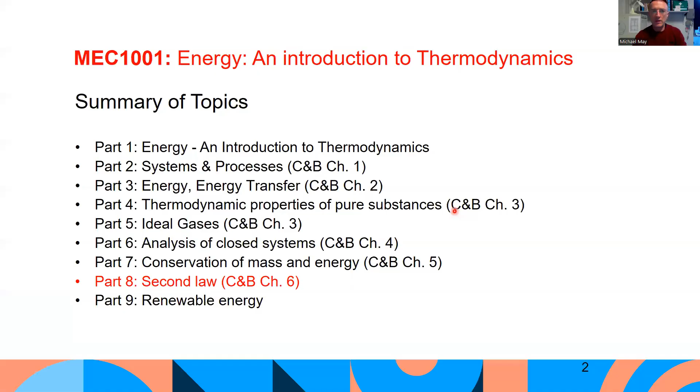So the second law, moving on to part 8, which is the second law. In this, we're going to cover the second law of thermodynamics, heat engines, refrigeration and heat pumps, the Kelvin, Planck and Clausius statements, Carnot cycle and perpetual motion machines.

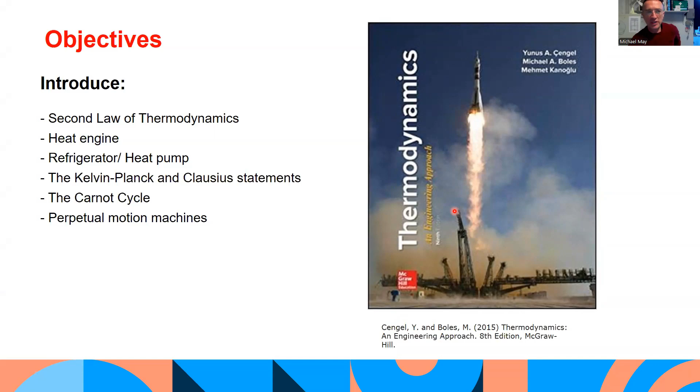So the first law basically tells us that energy is conserved. So if we think of a cup of coffee that's 80 degrees in a room that's 20 degrees, eventually when the coffee cools down, its energy is migrated to the room. And that's the first law in action. The energy is not in the coffee anymore, it's over here in the room. So we've accounted for it somewhere.

But imagine the reverse situation happening. Imagine the energy in the room finding its way back into the cup of coffee again and heating it up. To do so would not violate the first law because energy is still conserved. But we know from observation and experience that this type of process doesn't happen. So we need a second, another law, basically, to cover this situation.

And that other law is the second law of thermodynamics. What the second law tells us is there's some different statements of the second law, which we'll cover, official statements of the second law, later. But it basically describes the nature of energy in the way that it moves. One way is from a high temperature to a low temperature, and not the other way around. So it will go from the warm cup of coffee to the cold room, but it won't go from the cold room to the warm cup of coffee spontaneously.

But another way energy moves is from a high quality to a low quality, and not the other way around. So an example of that would be a mechanical stirring device. You plug it in, the electrical energy is turned into mechanical shaft work, so that starts to rotate in the water. As it does, the water heats up, and that heat eventually dissipates to the surroundings.

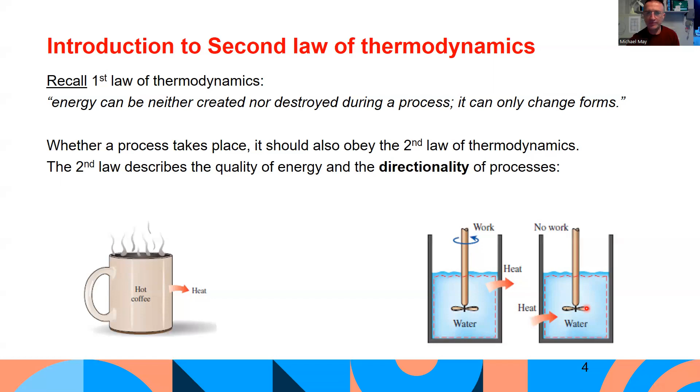We do have systems that will help us do that. A system that will help us take an amount of heat and turn it into work is called a heat engine. It needs an energy supply to do that, and we're going to go through heat engines in a few moments. The system that will help us move energy from a low temperature to a high temperature is a refrigerator or heat pump, and that also requires energy in the form of a work input to make it happen. We'll go through that in the second part of part 8 of the course.

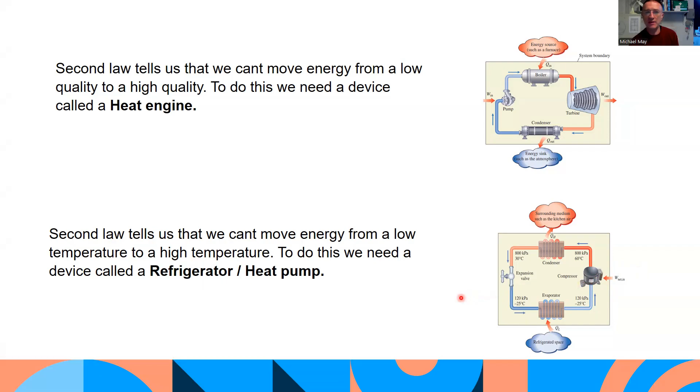So before we introduce the concept of a heat engine, let's introduce the concept of a thermal energy reservoir. A thermal energy reservoir is a hypothetical body with a large amount of thermal energy capacity that can absorb or supply heat without undergoing a change of temperature.

So imagine putting a small cup of coffee or a small cup of water into a large container of water that's at 30 degrees. If the cup of water is at 90 degrees, it's probably not going to change that large body of water to any great extent. If you had a very, very sensitive measuring instrument, you might detect a small change. So for all intents and purposes, it's a thermal energy reservoir that can give or receive energy without noticing a temperature difference itself.

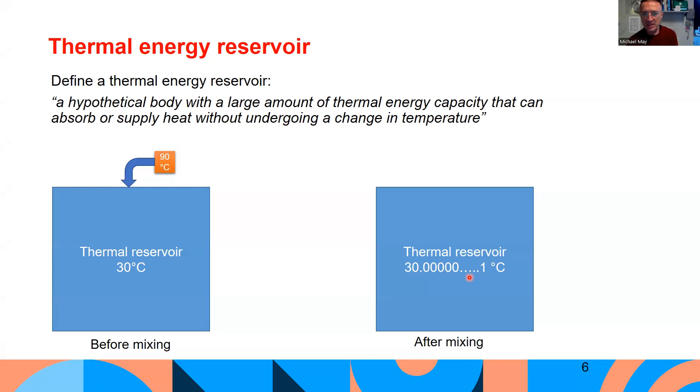Examples would be large bodies of water. For example, the power plant down in Poolbeg gives up its energy to the Liffey water, and the Liffey water doesn't experience any change in temperature because it's such a huge, large body of water. The atmosphere is another example - some power plants release their waste energy to the atmosphere, and the atmosphere's temperature doesn't change because it's so big in comparison to the small emission of heat from the power plant.

Liquid vapor systems go through the latent heat of evaporation. As water boils, for example, it absorbs heat but won't show a temperature difference. A furnace regulated at a certain temperature can give off heat and supply it to another process without having its own temperature drop. So there are two types of heat reservoirs: a source, which supplies energy in the form of heat, and a sink, which absorbs energy in the form of heat.

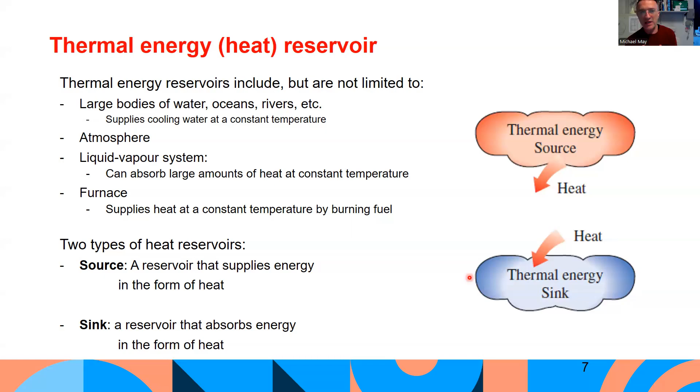That brings us to the definition of a heat engine. It's a device that converts heat into work, characterized by the following: it receives energy from a high temperature reservoir, an amount of that heat is converted into work, some energy is wasted or rejected to a low temperature sink, and the working fluid operates in a cycle.

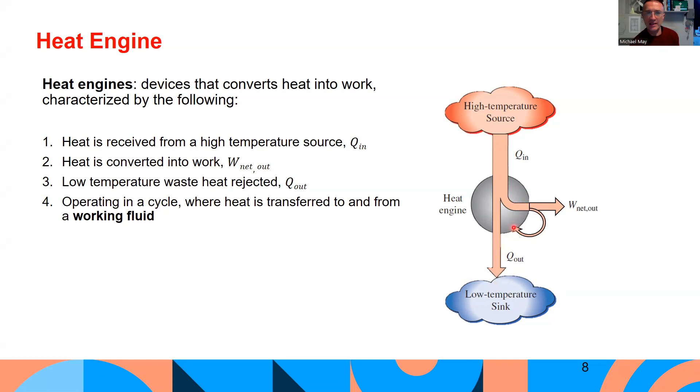So once again, a heat engine is a system that performs the conversion of thermal energy into mechanical work. The system brings a working fluid via a heat source from a high temperature reservoir, while transferring heat to the colder sink until it reaches a low temperature state. During this process, some of the thermal energy is converted into work by exploiting the properties of the working substance.

So we take energy from a high temperature reservoir, produce an amount of work, there's heat given off to a low temperature sink, and the working fluid operates in a cycle.

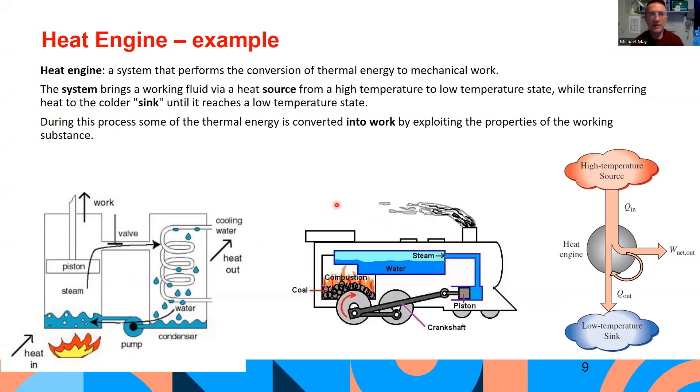Some people regard the internal combustion engine as a heat engine, but strictly speaking, the working fluid's not operating in a cycle. Compared to the book we work off, it's not strictly a heat engine, because the working fluid is the air and fuel mixture at the intake, and when it combusts, it goes out in the form of gases, not to come back into the system again.

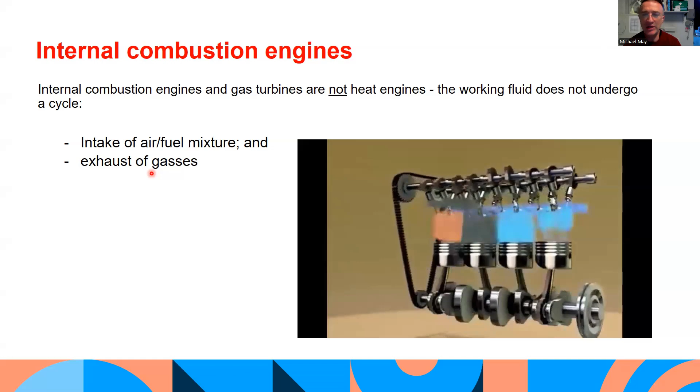Now, the theory about steam engines is quite old, and the internal combustion engine is more recent. So they're categorized in more recent times as heat engines, but don't strictly fall under that category according to the strict definition where the working fluid operates in a cycle.

The best example we have is the power plant. We boil up water in the boiler, it becomes superheated steam and drives the turbine. Then the water condenses back down to liquid again, and it's fed back to the boiler.

So we're taking energy from a high temperature reservoir, let's say the burning of natural gas or even a nuclear reaction. The amount of work is done at the turbine, then there's heat given off at the condenser, and the working fluid operates in a cycle.

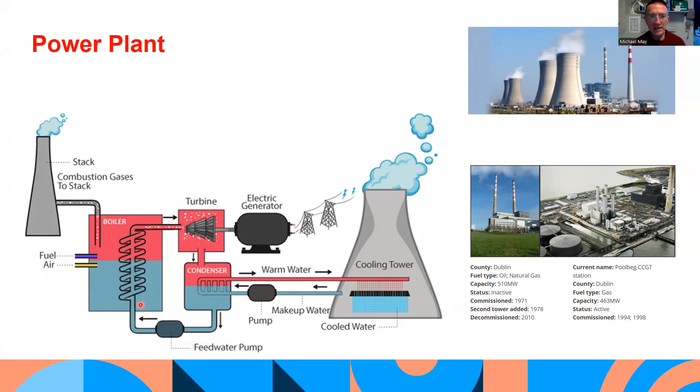The net work out of a heat engine is the work coming out of the turbine minus the work that goes into the pump to circulate the working fluid. For a system undergoing a cycle in steady state operation, the net work out equals the net heat.

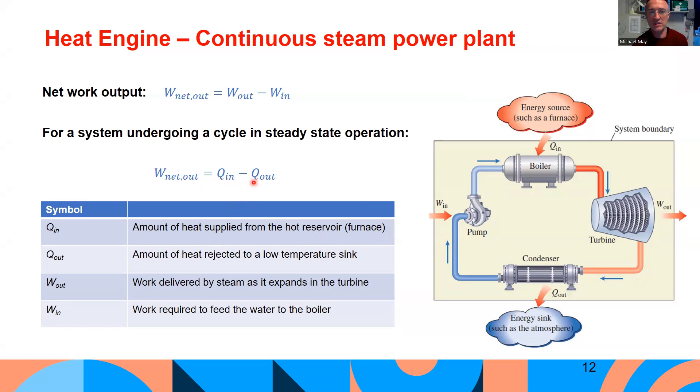So the thermal efficiency is the net work out over the total heat - what we're getting out of the system in the form of work, divided by the heat that goes in to make that happen.

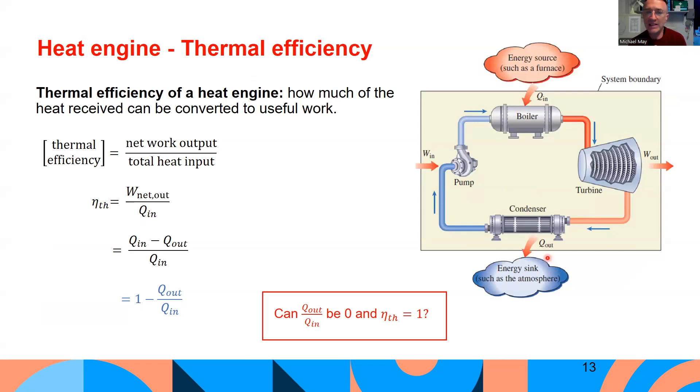That's the efficiency. As we've already seen, the net work out can be expressed in terms of Q in minus Q out. Mathematically, that can be rearranged as 1 minus Q out over Q in. And what we can see from this equation is that if Q out was 0, this term would be 0, so 1 minus 0 is 1, which is 100%. So if we could eliminate this step where we waste energy from the condenser to a low temperature sink, we could make this system 100% efficient.

So the question is, can we do that? And the answer is no, and it's because of the second law of thermodynamics. This illustration is often used to explain it.

So we have gas at 30 degrees. It receives energy from a high temperature reservoir operating at 100 degrees, and the gas expands up to 90 degrees. The purpose is to lift this load, move the piston up to the higher stops, lift the load up, and then take it off. So it could be a materials handling system, for example.

Now what we want is for the gas at 90 degrees to cool back down to 30 degrees. For this system to be 100% efficient, we need to move that energy from the reservoir at 90 degrees to the reservoir at 100 degrees. But we know from the second law that we can't do that. We can't move energy from a low temperature to a high temperature. So what we have to do is bring it in contact with a low temperature reservoir and move that energy from 90 degrees to 20 degrees in order to bring it down to 30.

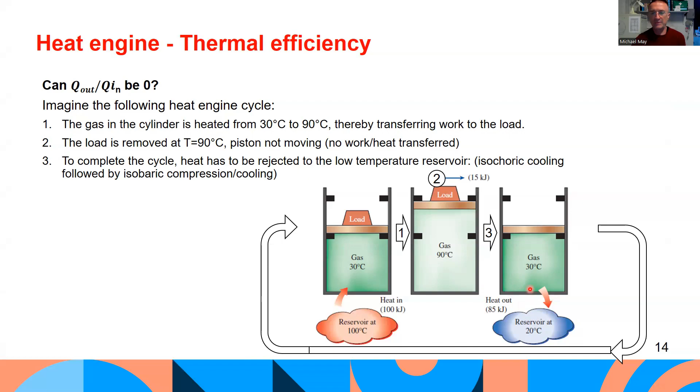So the second law, in this context, is expressed by a number of different statements. There are two classic statements of the second law, and one of them is the Kelvin-Planck statement, devised by Lord Kelvin and Max Planck. It comments on the thermal efficiency of a heat engine.

It says it is impossible for any device that operates on a cycle to receive heat from a single reservoir and produce a net amount of work. So what that means is this system is impossible. We can't take energy from a high temperature reservoir and turn it all into work with the system operating in a cycle. We need a low temperature reservoir for that to happen.

In equivalent words, it's saying no heat engine can have a thermal efficiency of 100%. For a power plant to operate, the working fluid must exchange heat with the environment as well as the furnace.

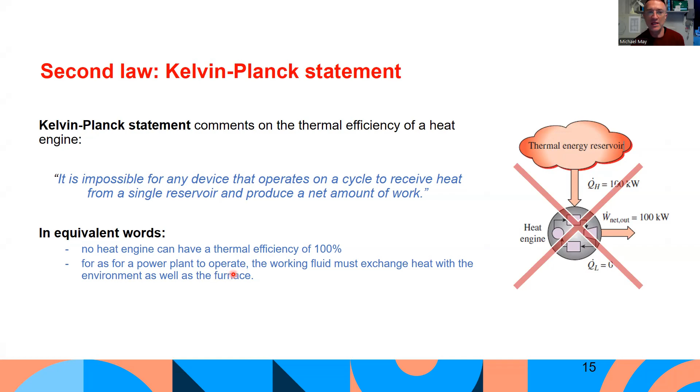So what we've established is that we can't have 100% efficiency from a heat engine. We've also established that we can calculate the actual thermal efficiency using this simple equation: 1 minus Q out over Q in.

But the question remains, what is the maximum efficiency that we can get from a heat engine? If we know that, we can strive for it. If we don't know it, then we're operating in the dark. So to answer this question, we need to introduce the Carnot cycle and the concept of the reversible process.

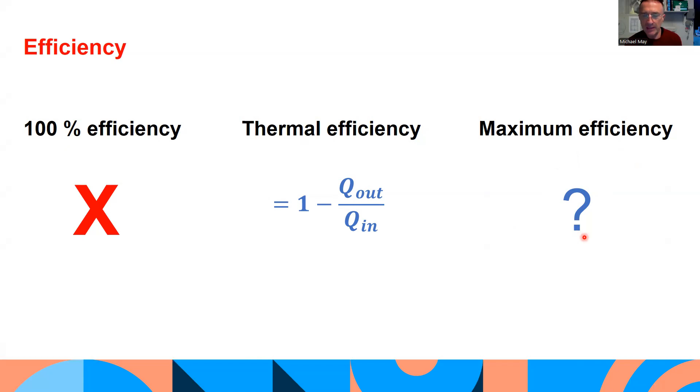So let's start with the reversible process. A reversible process in thermodynamics is an idealized process that occurs so slowly and smoothly that the system is in near perfect equilibrium at every stage. In other words, a reversible process is one where both the system and its surroundings can be returned to their original states with no net changes in the system or the environment.

An analogy would be a cup of coffee losing its energy to the room and cooling down. But if that energy were to spontaneously find its way back into the cup of coffee again and heat it up, that would be a reversible process. A more practical example would be compressing this cylinder from state 1 to state 2 along this process path, and if we then expanded it back to its original position along the exact same path, there would be no net work produced, no net heat. This would be a reversible process, returning to its original position without affecting the surroundings by taking or giving heat or work in any shape or form.

So, to restate: a reversible process in thermodynamics is an idealized process that occurs so slowly and smoothly that the system is in near perfect equilibrium at every stage. In other words, a reversible process is one where both the system and its surroundings can be returned to their original states with no net changes in the system or the environment.

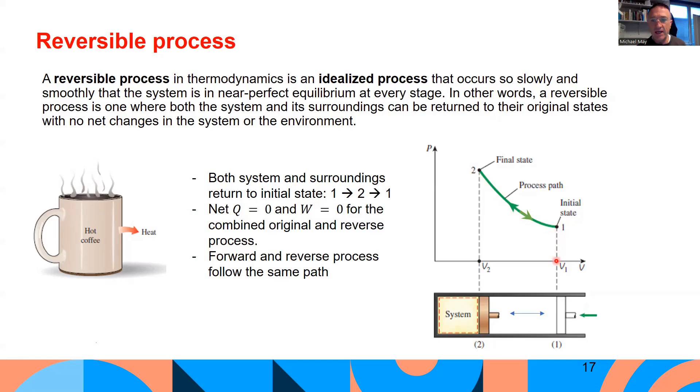Characteristics of reversible processes: they occur infinitely slowly, allowing the system to adjust at each infinitesimal step, ensuring the system remains in equilibrium. Every infinitesimal change is perfectly controlled with no dissipative effects like friction, turbulence, or unrestrained heat flow that would otherwise cause energy loss or irreversibility.

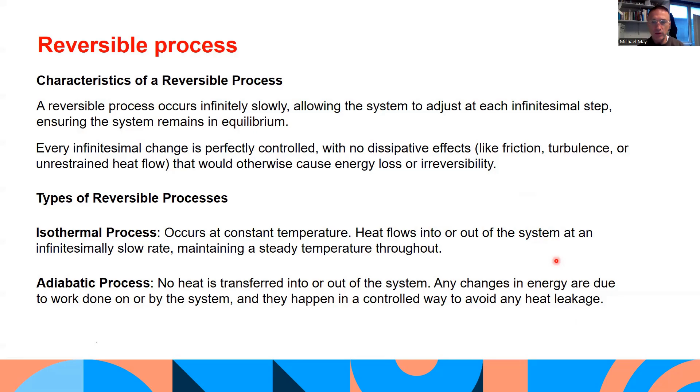Examples of theoretical reversible processes would be an isothermal process that occurs at constant temperature. Heat flows in or out of the system at an infinitesimally slow rate, maintaining steady temperature throughout. And an adiabatic process, where no heat is transferred in or out of the system. Any changes in energy are due to work done on or by the system, and they happen in a controlled way to avoid any heat leakage.

So irreversibilities. Reversible processes don't occur because of what we call irreversibilities. The main forms of irreversibility that occur in our thermodynamic systems are heat transfer across a finite temperature difference, friction, and unrestrained expansion of a gas. Other examples would be the mixing of two fluids, electrical resistance, and chemical reactions. Once they're done, you can't undo them.

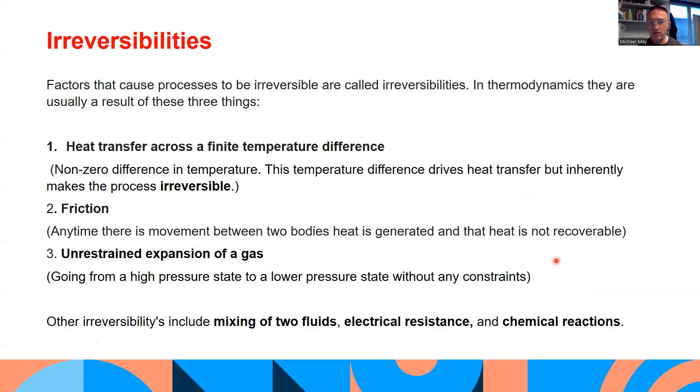So let's take the first one: heat transfer with a finite temperature difference. This is where we have a measurable temperature difference between two systems. We know that energy is going to flow from the warm temperature—let's say we had a room—energy is going to move from the warm room to the cold room, but it won't move the other way. So it's not a reversible process.

One way we could reverse that is by putting a heat pump in there, absorbing the energy from the cold room and putting it back into the warm room. But that requires a work input, so it's not leaving the surroundings unaffected.

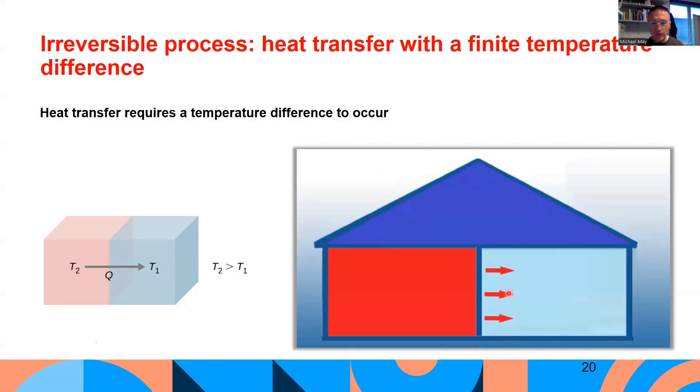It is somewhat true to say, though, if we have, let's say, 500 degrees and 10 degrees, and energy is moving from 500 degrees to 10 degrees, that's an irreversible process. But the closer those temperatures come to each other—let's say we now have 20 degrees and 19.99 degrees—theoretically, that is a more reversible process. To the extent that if we want to make a process reversible, we can bring the temperatures so close together that there's an infinitesimal difference between the two of them, and theoretically it becomes reversible.

And we do have a process, as we've mentioned, in which heat transfer does occur when temperatures are the same, and that's an isothermal process. So if you think of boiling water, when you hit the saturated liquid pressure and temperature, it's going to want to boil. As you apply more heat, the pressure and temperature stay the same, and all the energy goes into converting the water into vapor. That's an isothermal process in which there's heat transfer.

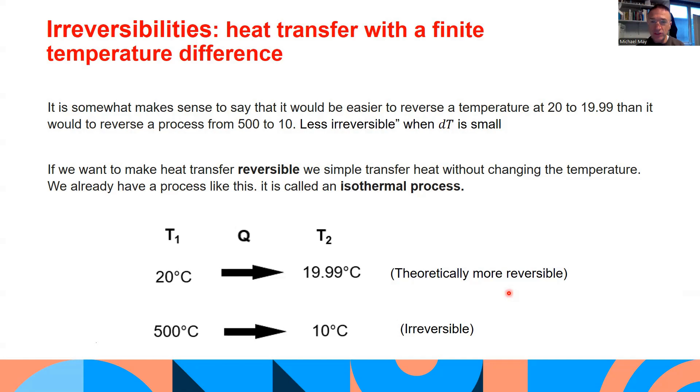Friction is an irreversible process as well. When two objects move against each other, friction is generated. It manifests itself in the form of heat and dissipates to the surroundings, never to be recovered.

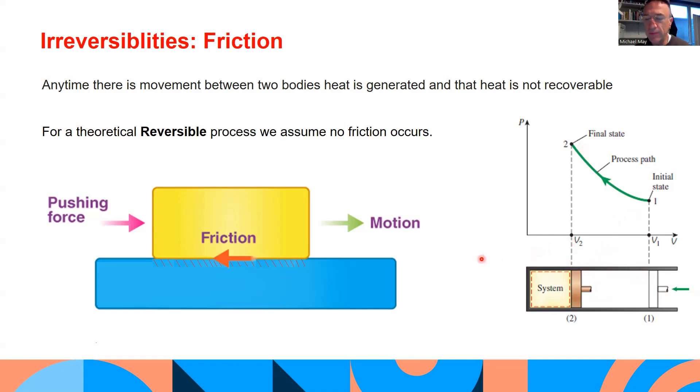So in the example of the piston cylinder system, where we move from one point to another, if we want to maintain that gas in there without it leaking, we need a good fit between the piston head and the cylinder, but we also need a seal to make sure that gas doesn't leak. So now what we have is sliding friction. It manifests itself in the form of heat and dissipates to the surroundings. Going back exactly the same way along this process path is not possible because of that heat loss.

Unrestrained rapid expansion of a gas. An example would be popping a balloon—try and unpop that balloon and put the gas back in there.

A more practical example is if you had a vessel, and halfway down the vessel you had a rubber membrane, with a pressurized gas on one side. You then ruptured that membrane and the gas filled the whole chamber. How do you get that gas back down one end of the chamber? One way would be to use a piston and compress it back down. But to do that requires a work input, so you're not leaving the surroundings unaffected—that's another form of irreversibility.

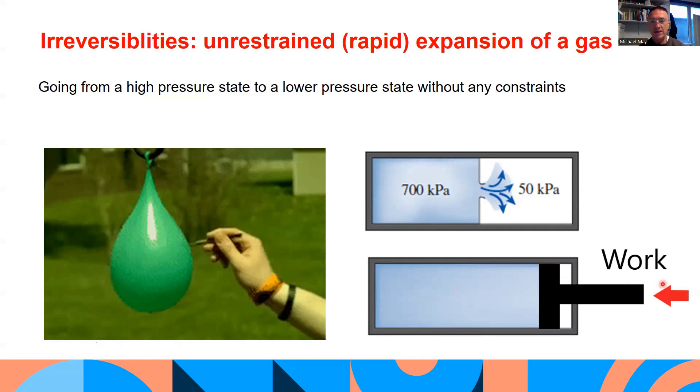Reversible processes move very, very slowly. Because of that, they produce most work for work-producing devices, and they require the least amount of work for devices that require a work input. So if we can maximize the amount of work coming out of the turbine and minimize the amount of work going into the pump, we make the net work as big as possible, which increases our efficiency. So ideal or reversible processes are ones that move so slow that they optimize the net work from the system.

To explain that with an analogy, and this analogy is used in the book, let me go through it. Imagine you've got a swimming pool full of water and it has a movable side on it on frictionless rollers, so that friction doesn't become an issue.

Let's say during expansion, we move that side of the wall very fast. If we do that, we disturb the level of the water. We minimize the area of the water impacting upon that wall and helping us move it, which is not useful. During compression, if we move the wall very fast, we disturb the level of water once again, and we maximize the area of the water impacting upon the wall and preventing us moving it, which is not helpful either.

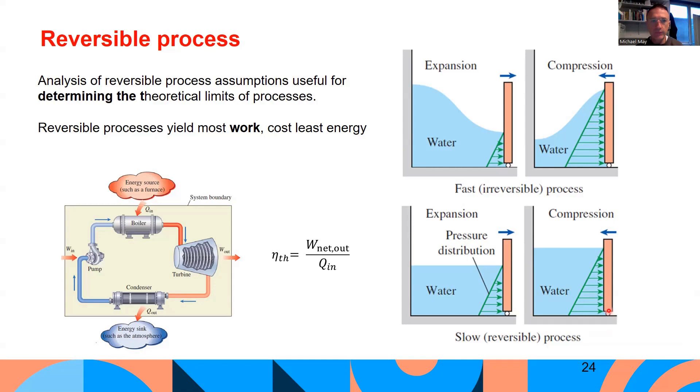So just to sum up, during a reversible process, no heat transfer occurs when a finite temperature difference is involved. So there's no temperature difference, basically, but there is heat transfer. During a reversible process, no friction is involved. The ideal gas law is always true for the gas. A reversible process occurs infinitely slowly, and it yields the most work and requires the least amount of work as well. So they take out all of the inefficiencies in the system.

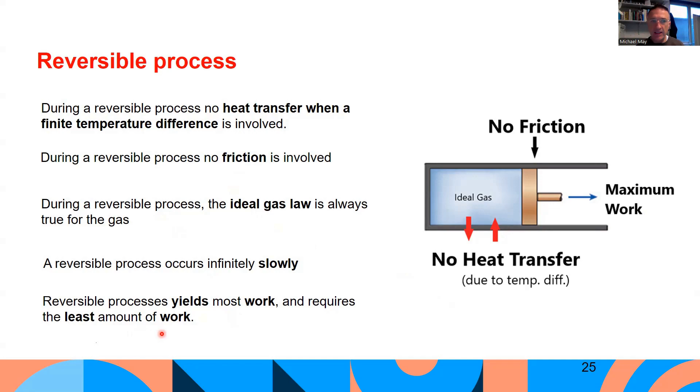Which brings us on to the Carnot cycle. It was a thought experiment conceived by French physicist Sadi Carnot in 1824, in which we imagine all four processes are reversible, and it provides an upper limit on the efficiency of any classical thermodynamic engine during the conversion of heat into work, or conversely, the efficiency of a refrigeration system in creating a temperature difference through the application of work to the system. It's used as a standard of performance for all heat engines operating between a high and low temperature.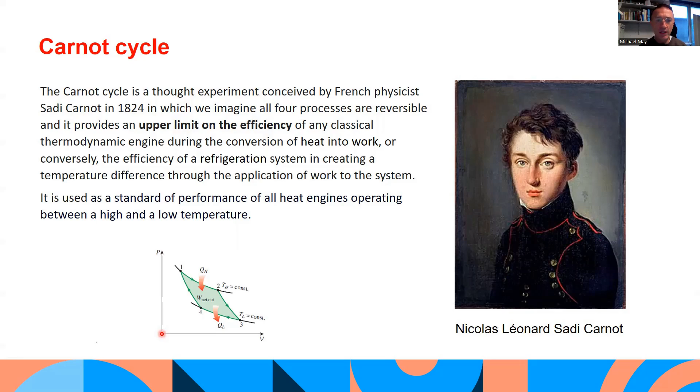So how the Carnot cycle works, and once again, it's theoretical. It's without all of those inefficiencies, and it will help us calculate the maximum efficiency for a heat engine operating between two particular temperatures.

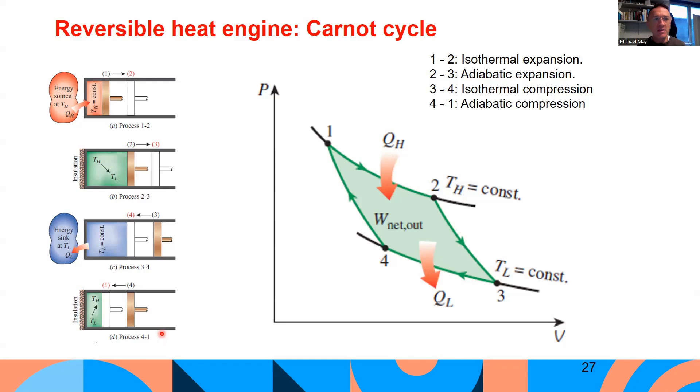So first of all, let's start here. From point one to two is isothermal expansion with heat transfer. What's happening is we have a gas operating at temperature TH, which is the same temperature as a high temperature reservoir that it's in contact with. As the gas expands, the piston wants to move. As the piston moves, TH wants to drop. But if we do this very, very slowly, it doesn't get an opportunity to drop because heat is transferred from the high temperature reservoir. So for all intents and purposes, there's no temperature change, but there is heat transfer. It's isothermal expansion, in which heat transfer occurs at constant temperature. That's 1 to 2 on the PV diagram.

So 2 to 3, what we do is we remove the high temperature reservoir and we insulate the piston. So now there's no heat transfer in or out of the system. It's an adiabatic process, and we let the gas cool down from TH to TL. As it does, the piston moves and does work for us. So that's 2 to 3.

Now we look over here, we've 3 to 4. What happens now is we remove the insulation. We put a low temperature sink in contact with the piston, and we compress the gas with an external work input. As we do that, TL wants to increase in temperature. But if we do it infinitely slowly, as it tries to increase in temperature, there's heat transfer from the gas to the low temperature sink. So it never gets an opportunity to increase.

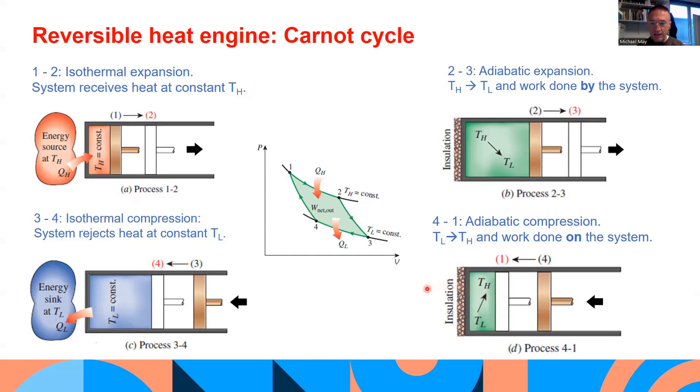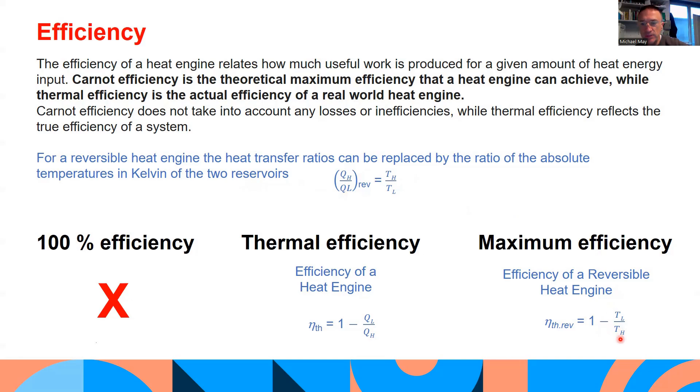So here's an example. A heat engine operates between a source at 477 degrees Celsius and a sink at 25 degrees Celsius. If the heat is supplied to the heat engine at a steady rate of 65,000 kilojoules per minute, determine the maximum power output of this engine.

So we have our low temperature and our high temperature, but we need to just convert them to absolutes. And when we do, we find out that this heat engine has a maximum efficiency of 60.2%.

Now what we want to find is the maximum power based on that efficiency. So we know what the heat transfer rate is. We've got the efficiency equals the net work over the heat. If we do that in rate form, we've got the power equals the efficiency multiplied by the heat transfer, or transpose it. So we have our heat transfer, we just need to divide it by 60 to go from kilojoules per minute to kilojoules per second, multiply that by the efficiency to get the power output, and it's 652.2 kilowatts.

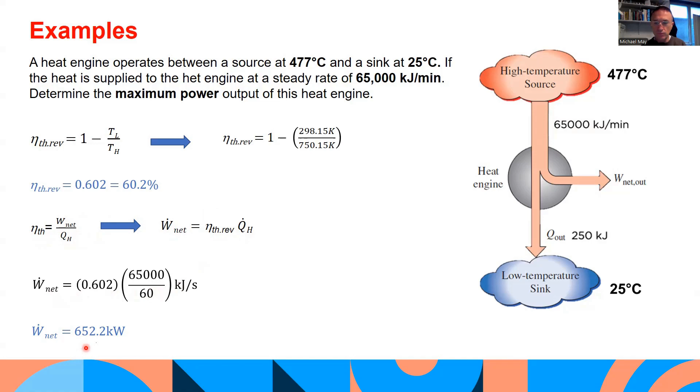Another one: a Carnot heat engine receives 700 kilojoules of heat from a source of unknown temperature and rejects 200 kilojoules of it at 10 degrees. Determine the temperature of the source and the thermal efficiency of the Carnot heat engine.

So what we need to do, first of all, TH is determined from the definition of the Carnot efficiency. So the heat ratios equal the temperature ratios. We have the heat ratios, we just need TH. So we have the heat ratios, we have TL converted to absolutes. From that, then we can calculate TH.

And once we have TL and TH, the Carnot efficiency is 1 minus TL over TH. So the maximum efficiency we can get from this system is 71.4%.

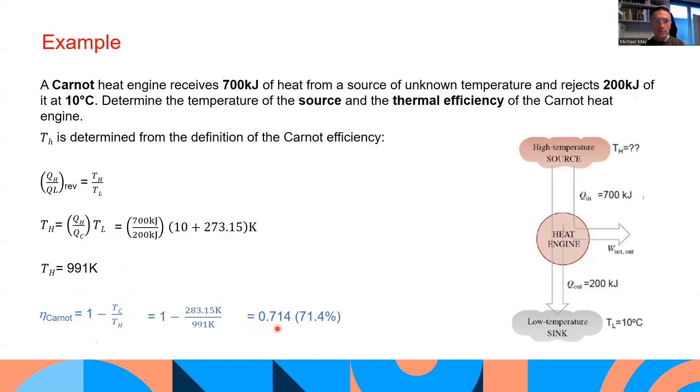Consider a reversible Carnot heat engine that operates between the thermal reservoirs at 520 degrees C and 15 degrees C while producing a net output power of 60 kilowatts. Determine the thermal efficiency of the Carnot engine, the rate of heat transfer to the engine, and the rate of heat rejection from the engine.

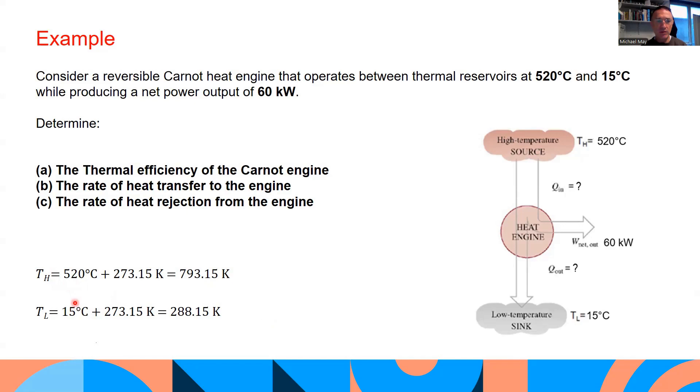So we first convert our two temperatures to absolutes and then put them into our Carnot efficiency. And the maximum efficiency we can get from this engine is 63.7%.

So once we know that, this is the efficiency equals the net work over the heat. Transpose that to get the heat on its own. Now do it in rate form: Q dot equals W dot over the efficiency. And now to find Q dot, we put the power out over the efficiency, and we'll find out the amount of heat that comes in from the high temperature reservoir.

If we want to know the rate of heat rejection from the engine, in other words, Q out down here, we'll use this expression: W net equals QH minus QL. In rate form, it looks like this. And QL, when we transpose that equation, is 34.2 kilowatts. So we've 94.2 kilowatts coming in here, 34 is rejected and wasted to a low temperature sink, but we produce 60 kilowatts of work from the heat engine.

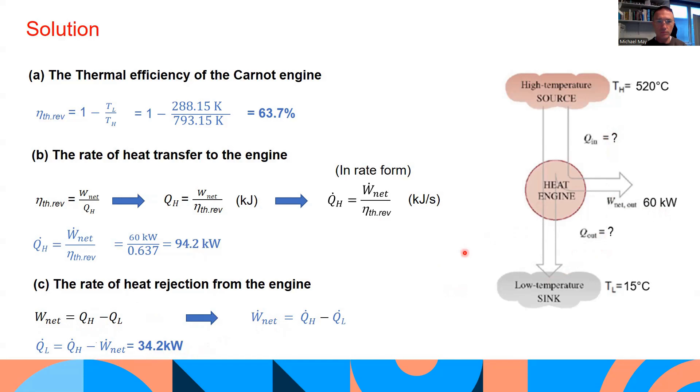So once again, we have one temperature there. We convert it to absolutes. This is the Carnot relationship between the heat ratios and the temperatures. So we have our heat values. We have TL, so we want TH, and it's 772.6 Kelvin. Then to find out the efficiency of this engine, once we have our two temperatures, it's 1 minus 1 over the other, and it works out at 71.6% efficient.

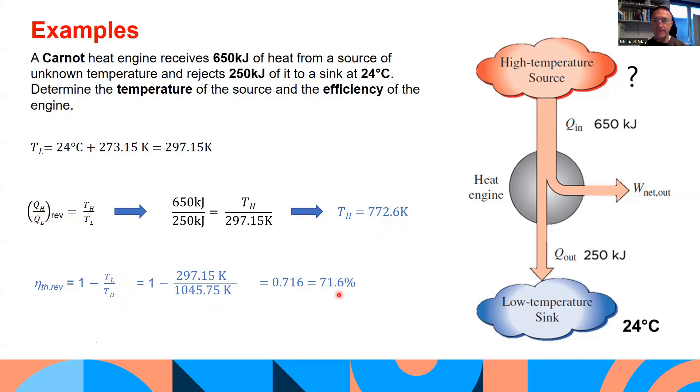So the second law of thermodynamics has evolved into a rigorous scientific principle thanks to the contributions of Carnot, Clausius, Kelvin, Planck, and others. It encapsulates the idea that natural processes tend to increase the disorder or entropy of an isolated system and has profound implications for understanding energy transformations.

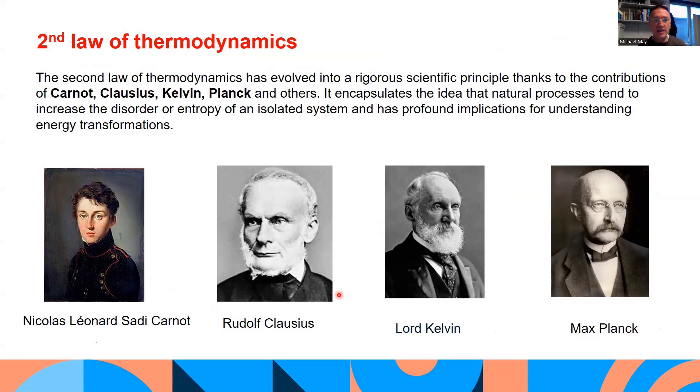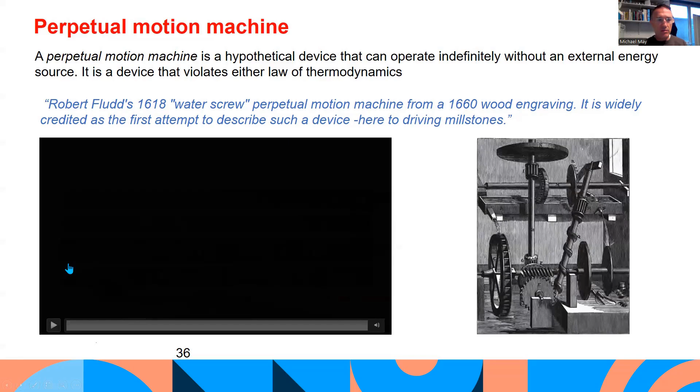So it basically tells us that we can't have a 100% efficient system. But the question remains, how efficient? It hasn't stopped people trying to make systems that are 100% efficient and basically work off their own energy. They're called perpetual motion machines.

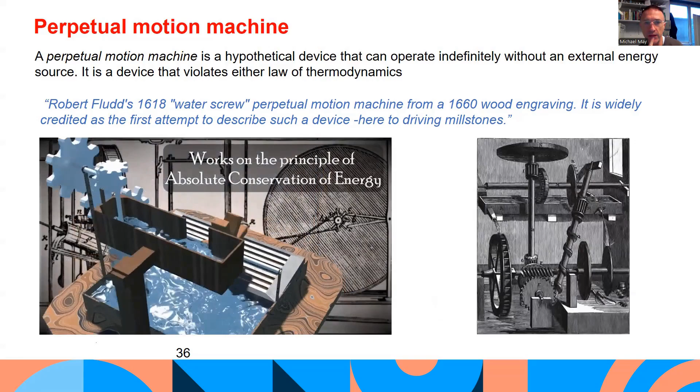This is one of an early attempt at a perpetual motion machine. It's called Robert Fludd's water screw. Basically what you have is an upper reservoir of water, and as you release that water, the potential energy in the water is turned into kinetic energy as it falls.

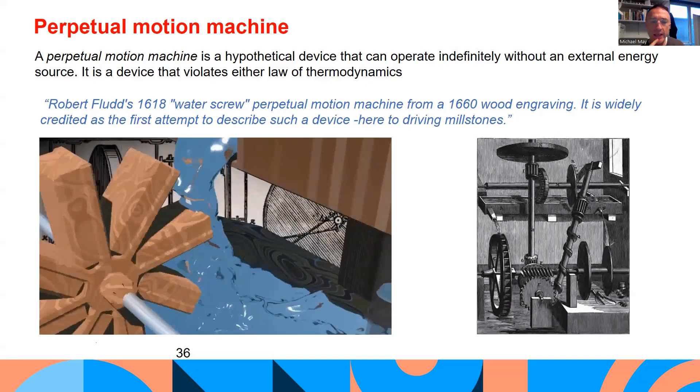That kinetic energy turns into mechanical energy rotating the gearing mechanisms. So the gears are ultimately connected to the water screw over here, which is operating in the other direction and bringing the water up to the higher reservoir. So in theory, all that potential energy will be turned into mechanical energy to bring the water back up again, and it will just keep going on and on.

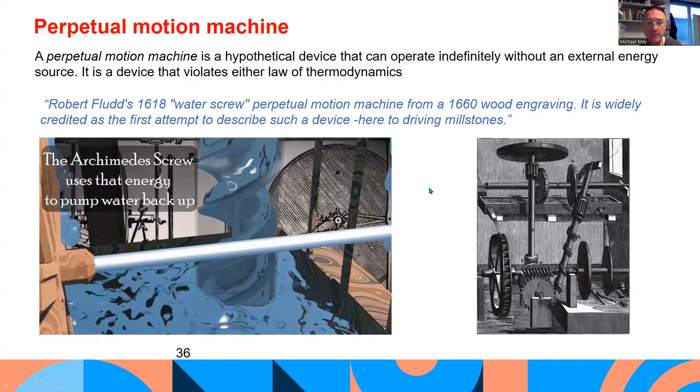However, all of the kinetic energy in the water is not converted into mechanical energy in the water screw, because some of it is lost in the form of friction in the gearing mechanisms. So eventually the upper reservoir will run dry and all the water will end up down the end. So friction is where the losses occur in this system.

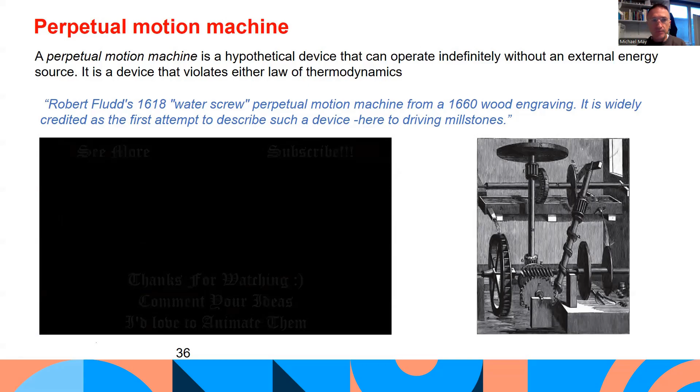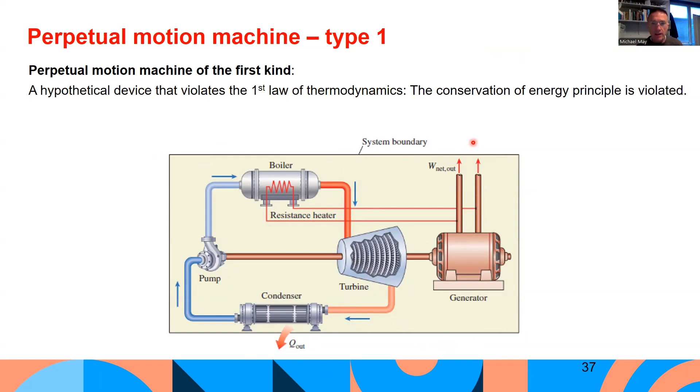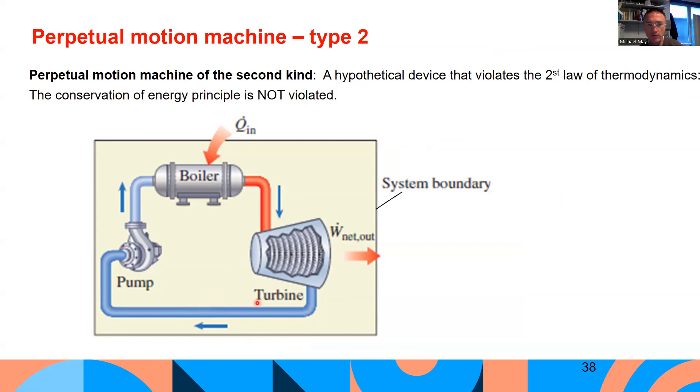A perpetual motion machine type 2 is one that violates the second law of thermodynamics. A simple example would be if we got rid of the condenser from the heat engine. What's happening then is you've got low-grade steam coming out of the turbine, but we want that in the form of liquid or compressed liquid water, so it can pump back to the boiler.